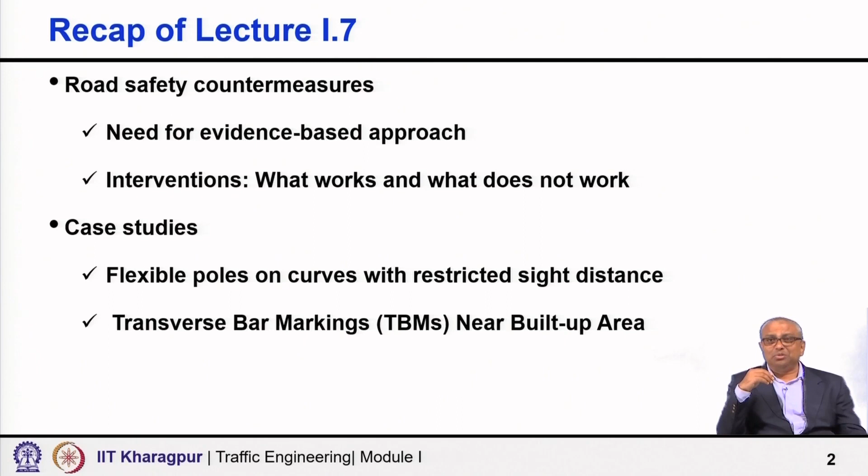With this background, today we shall discuss about the speed management measures. Why are we saying that it is important to focus on speeding? This is the very fundamental question which we should get convinced with the answers, and we should believe from the core of our heart that yes, it is important.

What are the reasons? First, speeding is a major cause of crashes. If you see the data in Indian context, I have shown many data in the beginning in the introductory lecture on this module, Module I Lecture 1. 71% of total crashes, more than that, and more than 67% of the fatalities, the reason is speeding as per the data record. That means speed is a major contributing factor in more than 70% of the crashes and more than two-thirds of the fatalities.

This itself could be the argument good enough to justify why we need to focus on speeding. Over and above, scientific evidences clearly indicate higher the impact speed, higher is the risk of fatality.

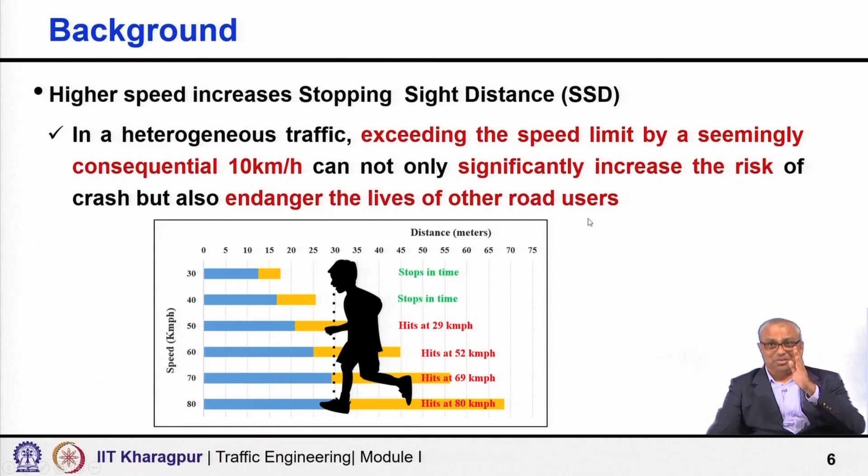So as per scientific evidences, the major cause is speeding, higher the speed, higher the fatality. Speeding narrows down the field of vision. Higher the speed, higher will be the stopping sight distance, the chance of hitting or fatality will also be high, and we have so many physical constraints.

So the only way is, if we want to still reduce the speed, we have to go for speed management and focus on speeding. That is the way out.

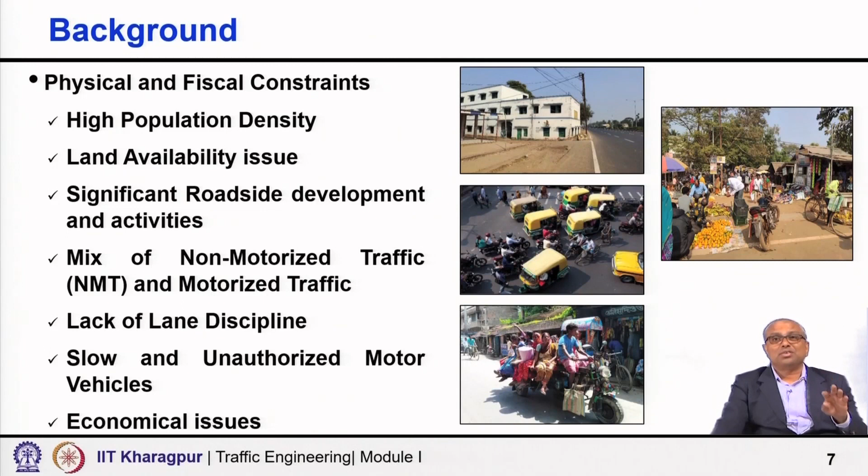So these are all the factors which decide the speed what the driver is using for travel. What is speed management? It is a large set of measures for balancing safety and efficiency of vehicle speed on a network.

And speed management does not include only deciding the speed limit. No, this is one of the components of overall speed management.

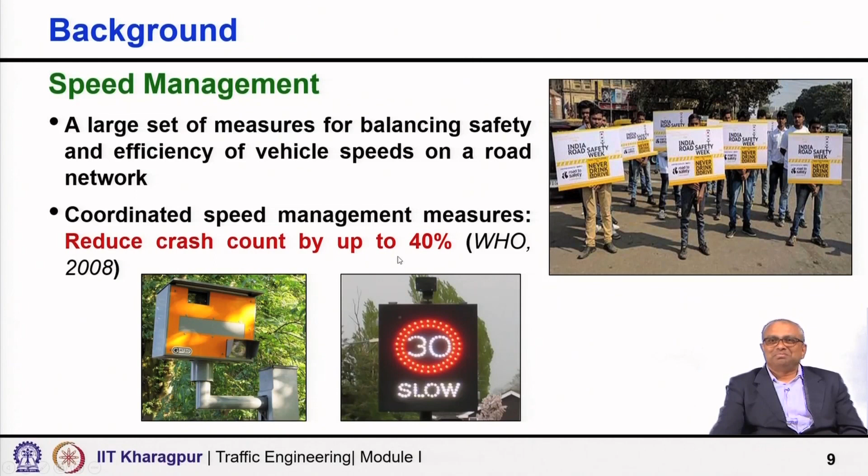Coordinated speed management measures, again this is vital evidence, is found to reduce crash count up to 40%, as high as 40%. See the impact, see the potential, significant impact.

Speed management has got significant impact on reducing severity and socioeconomic loss, and it helps us, speed management, to strike a balance between the safety and mobility. Mobility is also important, safety is also important.

We cannot get mobility at the cost of safety, and especially the fatal accidents, fatal crashes or the severe injury crashes. So a balance is to be maintained. Speed management helps us to maintain that balance.

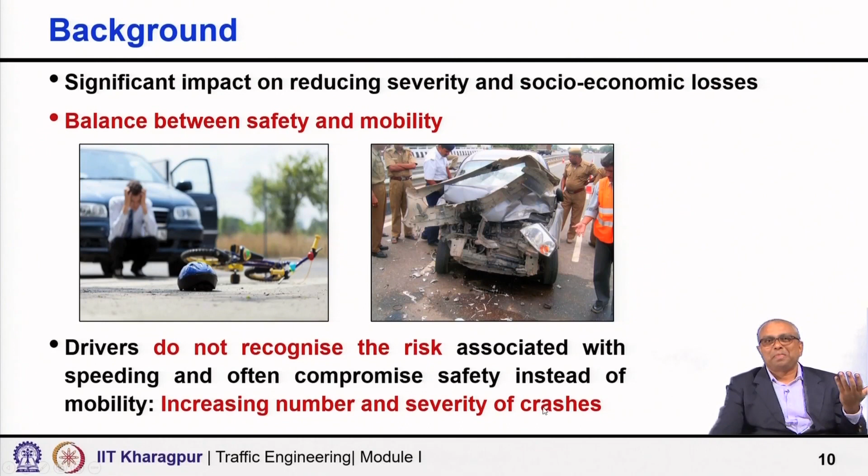Drivers do not recognize the risk associated with speeding and therefore often compromise safety instead of mobility, and the result is increasing number and severity of crashes. What are the measures for speed management?

Speed management measures encourage compliance with both advisory speed. Suppose you have designed a roadway for 80 km/h, right, and accordingly there is a speed limit. Accordingly there is a speed limit, that is the posted speed limit.

And also it could be, in some situation the road is passing through urbanized section or semi-urban development or passing through school zone, and you have a statutory speed limit, which is generally established by the state or the local authorities or the local legislatures. So speed management measures encourage compliance with both advisory speed and statutory speed limits, if any, and in most cases a combination of measures are required to create solutions appropriate to the needs of the location.

Given a location, what are the problems, what are the characteristics, and you need a combination of measures. Which are the key measures?

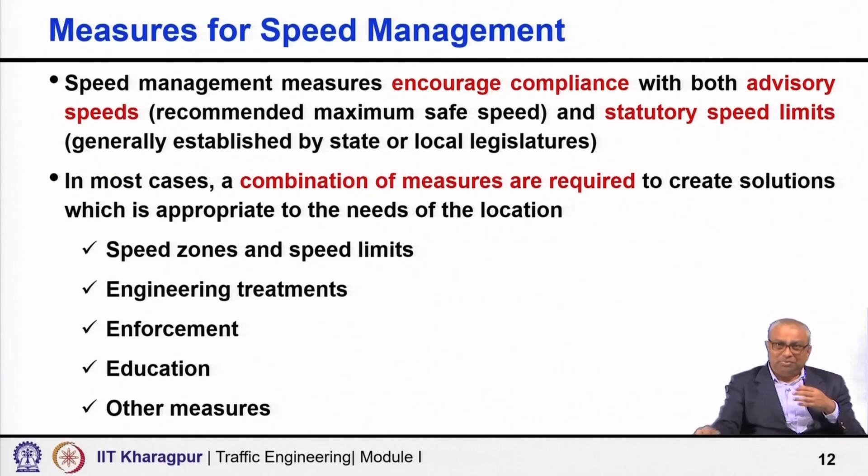Speed zones and speed limits, engineering treatments, physical changes, what you do, engineering treatments, enforcement, very important. Anything you do, if you do not enforce, it will fail. Education, also there are other measures. Let us discuss very briefly about each of these aspects.

First, speed zoning and speed limits. How are speed zoning and speed limits done? One side is based on classification of roads. We all know the functional classification. Different categories of road have different functions in terms of providing accessibility and in terms of providing the mobility.

If you take clearly the national and state highways, maximum, the primary thing is the mobility, not the accessibility. It is the mobility. So obviously my expectation or requirement of speed will be higher.

As compared to that, major district road, other district road, or go to a village road, no more mobility, it is basically the accessibility. So as per the functions, we know what speed zoning is necessary. So we can do speed zonings as per the classification of the road. Similarly, go to urban area, expressways or urban arterials and local streets do not have the same accessibility and mobility functions.

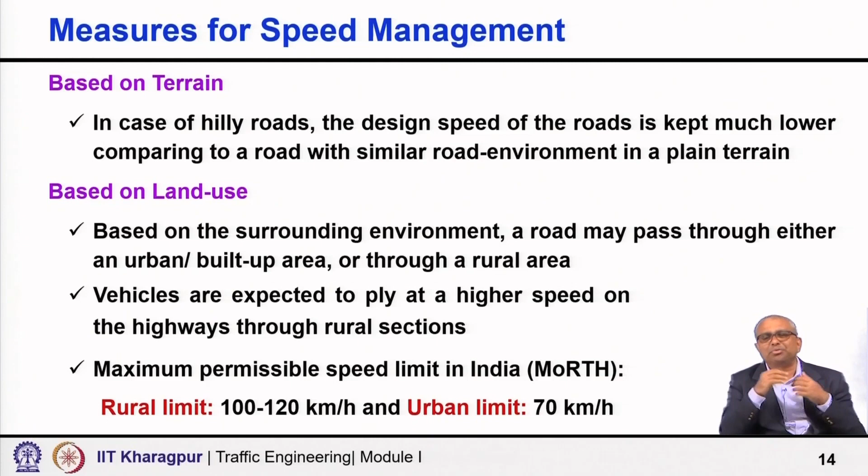Location specific speed zones - this is another way of doing speed zoning. My highway is passing through, say it is a national highway in plain terrain, but that does not mean throughout the length of the national highway, or a stretch of 100, 200, 300 kilometers passing through a state, I will be able to maintain the same speed. We may have to restrict the speed, bring it down as per the location specific requirement.

For example, road with mix of motorized and unprotected vulnerable users, market area, urban, semi-urban development, lot of movement of pedestrians, bicyclists, school zone - reduce to 30 km/h. This is based on human injury tolerance criteria. If a person is hit, the driver may make an error, and because pedestrians and bicyclists are unprotected, a crash might happen. So I am bringing down the speed - the crash chance is high, and I am reducing the chances of fatality and severe injury by setting it to 30 km/h.

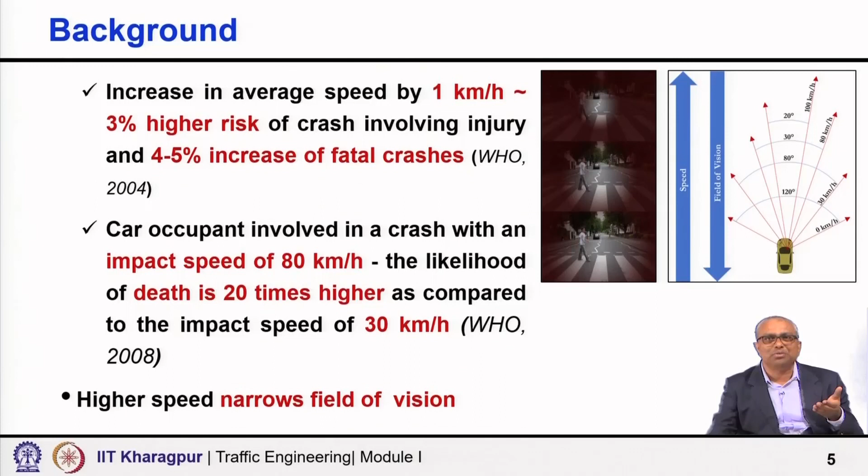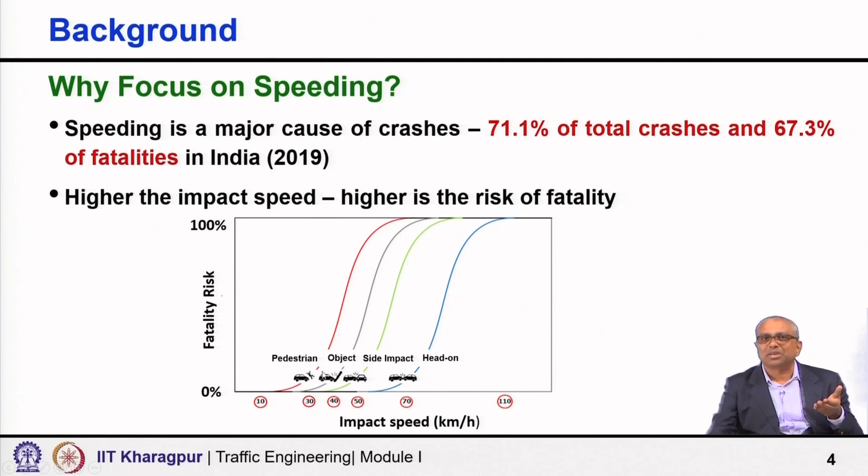You have seen this, I showed you the figure earlier also - here, if you are at 30 km/h, your chance of fatality risk will be only about 10% on a scale of 0 to 100. So make it 30.

Then roads with uncontrolled access, side impact, uncontrolled intersections where we have a crash history and such crashes have occurred - bring it down to 50 km/h, again based on scientific evidence, using injury minimization criteria.

Then for undivided roads, where head-on collisions may happen, 70 km/h should be the speed limit. So that means these are 30, 50, 70.

The focus is not just the road, but more on the road environment, vulnerable road users, crash history, and scientific evidence - pedestrian-vehicle, side impact, head-on collision. What we want is to minimize injury - this is the injury minimization criteria or human injury tolerance criteria: 30, 50, 70.

Generally, we would say 80 and above you can go, but you should only allow that for sections with controlled access facility, completely access controlled with physical median separation - no chance of head-on collision, no question of unprotected pedestrians and vulnerable users, segregation of slow moving vehicles, provision of service roads wherever land use demands it, to take slow moving traffic and non-motorized traffic out of the main carriageway, complete access control, and facilities for crossing.

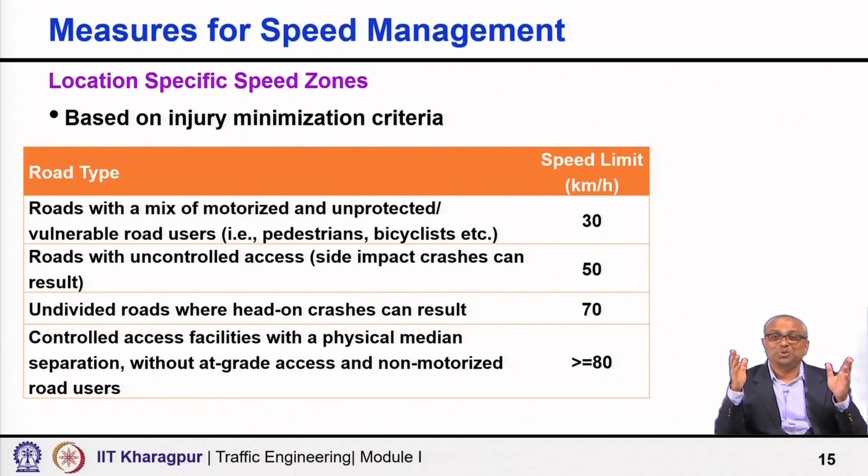You have to also think that for speed limits, road is important, vehicle type is important, lane usage is important, roadside is important, and most important thing in the context of the safe system approach is the human injury tolerance criteria for different types of crashes. We cannot afford to accept fatality and serious injury.

Speed limit in transition zones is required for roads where road function transitions happen, or where the speed of the facility needs to be restricted locally. That means if it is 80, you cannot suddenly make it 40. You need a transition from 80 to 40 - a direct speed change cannot happen. So if you go from 80 to 40, you probably need somewhere in between a 60 limit as well, so that the gradual speed change happens.

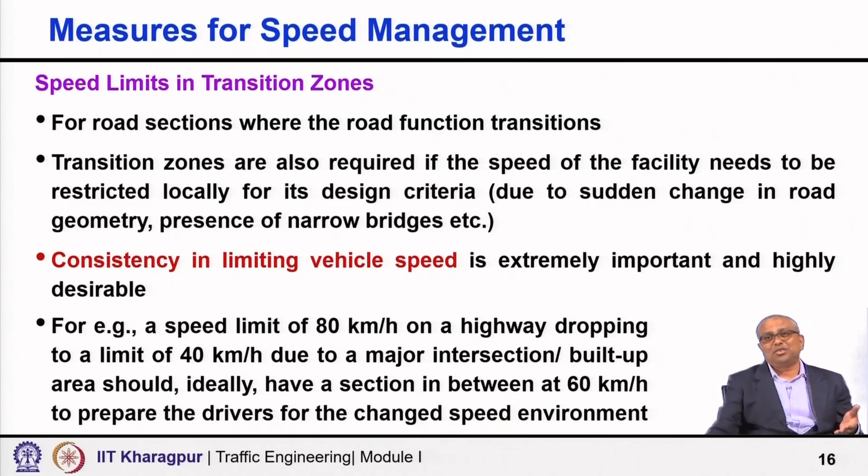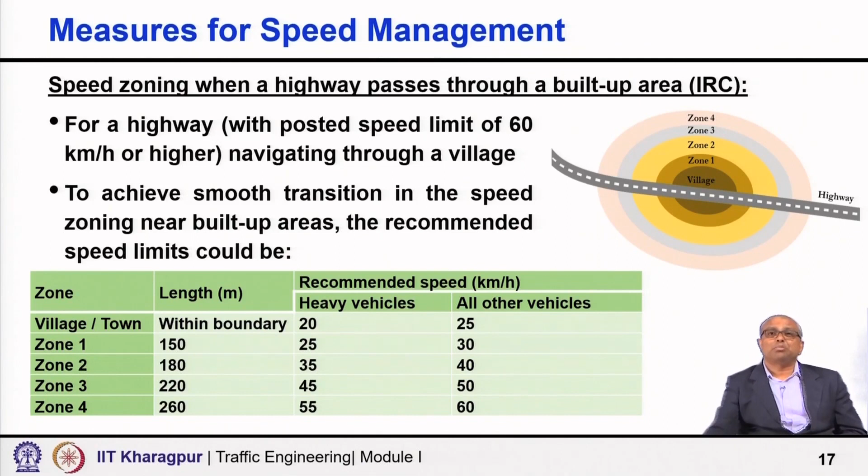Speed zoning, when a highway passes through a built up area - our Indian Roads Congress guidelines give this example. Suppose it is 60 kilometers and the road passes through a village. Within the village, suppose you want heavy vehicles at 20 kilometers, or other vehicles at 25 kilometers - it cannot come from 60 to 25 suddenly. You need zone 1, zone 2, zone 3, zone 4, at different distances. So zone 4 could have 60, but as the road enters the next zone I make it 50, then zone 2 it's 40, then 30, and then gradually you make it 25. So there are provisions, manuals and guidelines which say the transition should happen smoothly, not suddenly from 80 to 40.

Setting of speed limits has 4 basic principles. I'm not discussing each in detail, but the first is the road safety principle - setting speed limits to minimize the risk of fatal and injury crashes to all road users. This is basically the human injury tolerance criteria.

Second is the community well-being principle, suitable for setting speed limits on local roads, because the fundamental consideration there is community well-being. Third is the road network efficiency principle - the function of the road, from highway to district road to village road, or expressway to urban arterials down to local streets. These are important for setting speed limits in accordance with the function of the road and infrastructure standards.

The road user expectations principle means setting speed limits to be consistent with the road environment, characteristics and function of the road. I cannot have an environment which encourages people to travel at a higher speed because the surface condition or geometry is very good, while the road environment actually contradicts that. So it's important that the function, road user expectation, community well-being, and the road safety or human injury tolerance criteria have some kind of harmony, compatibility and consistency.

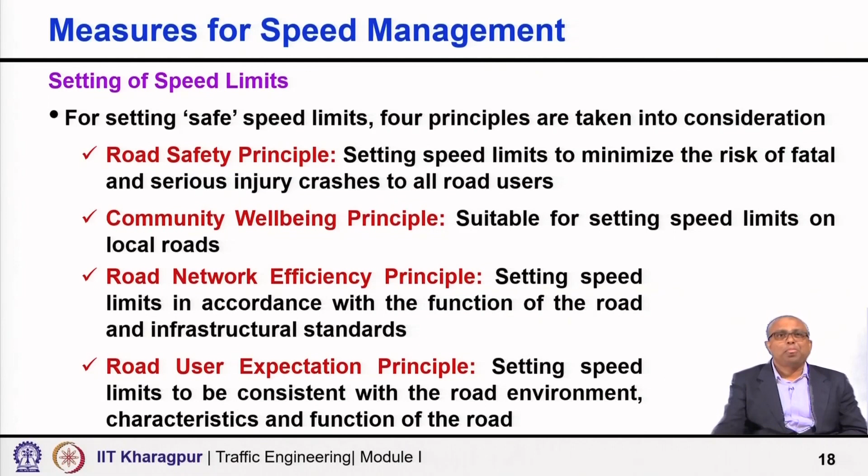These were all about speed zonings and speed limits so far. Now, quickly, engineering treatments - you have to do something; setting the speed limit alone will not work. It includes techniques to control traffic flow and speed, and does not deal with the road design aspect, meaning I am not deciding the design speed or curve design considerations or camber and super elevation.

Mainly these engineering treatments serve two purposes. One is treatments for slowing down, using kinds of traffic calming measures. I want a vehicle to reduce speed - as I was saying, if high speed is not desirable and a low speed is desirable, then my infrastructure should also help achieve that. It's not that the road will just be built and a sign alone will do the work - that will not be possible.

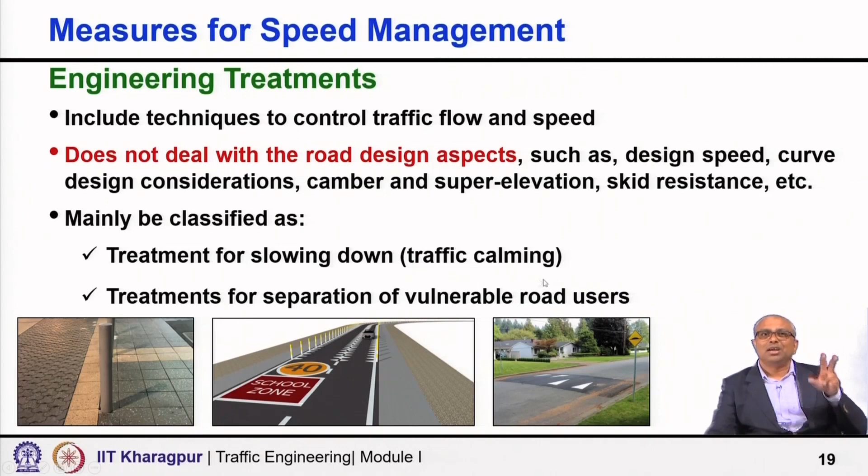Second, engineering treatment is required for separation of vulnerable road users - footpaths, pedestrian underpass, pedestrian overpass or foot over bridge - any kind of infrastructure facility created for separation of vulnerable road users from mainstream high speed motorized traffic. So engineering treatments are aimed at achieving these two things: treatments for slowing down or traffic calming, and treatments for separation of vulnerable road users.

Next, enforcement - very, very important as part of speed management. Whatever your speed limit is, whatever engineering treatment or limitation you do, nothing will give results unless you have enforcement. That has to be there. People should be afraid that if they violate, they will be caught and punished. So enforcement is an effective mechanism to administer penalties for offending vehicles.

It acts as a deterrent. Some tools, as part of speed management, include the use of red light cameras, speed cameras, interceptor vehicles, and proper penalties and fines - but fines that have no real impact serve no purpose.

So small a value is not at all a deterrence, and that is also not desirable, because my objective is not to collect money, but to create a deterrence. So, the penalty must be effective enough to create that deterrence.

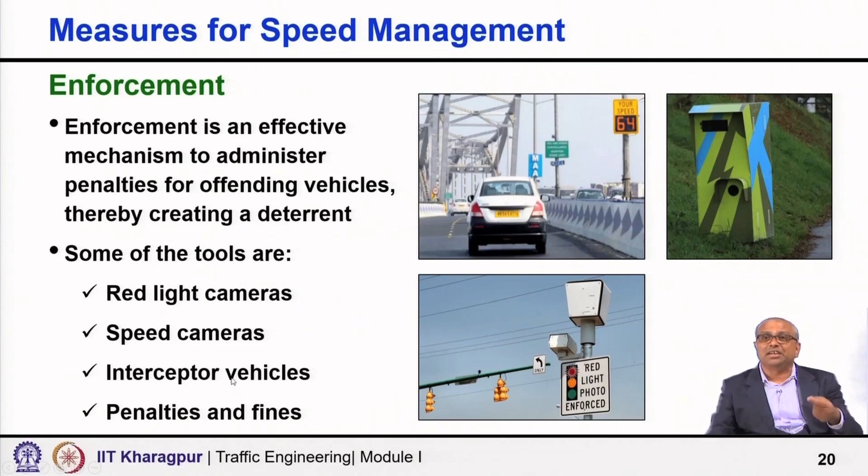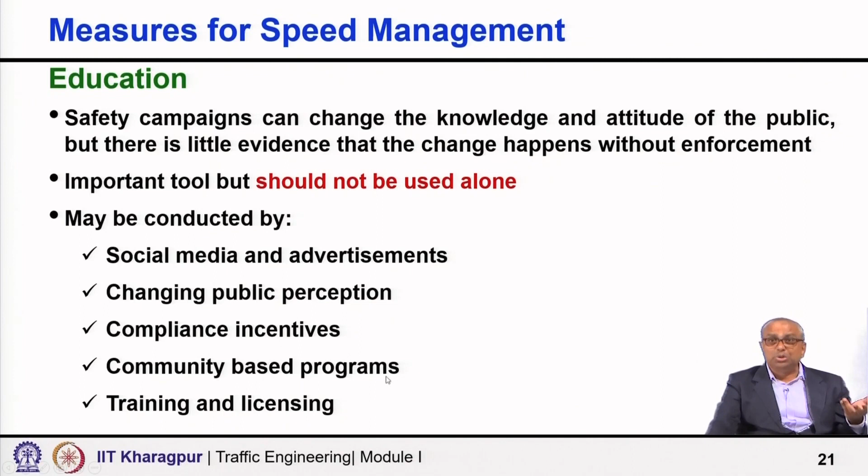Education and awareness are also part of overall speed management. I need to educate drivers. Driver training is again very important. Before licensing, train the driver, give them required knowledge, give them required skill, and since in countries like India overall road user awareness is low, we may use different tools, for example, social media, changing public perception, compliance incentives, community based programs, training and licensing, all may be useful. Then there are other measures which may include psychological measures.

Physical measures are one thing, but here we are trying to use psychological measures to increase the cognitive burden and change the behavior. Psychological measures generally produce smaller speed reduction, but sometimes they are more acceptable to drivers, and that small reduction may also be quite useful. Examples may be the presence of trees or overgrowth on the roadside, or rough road surface.

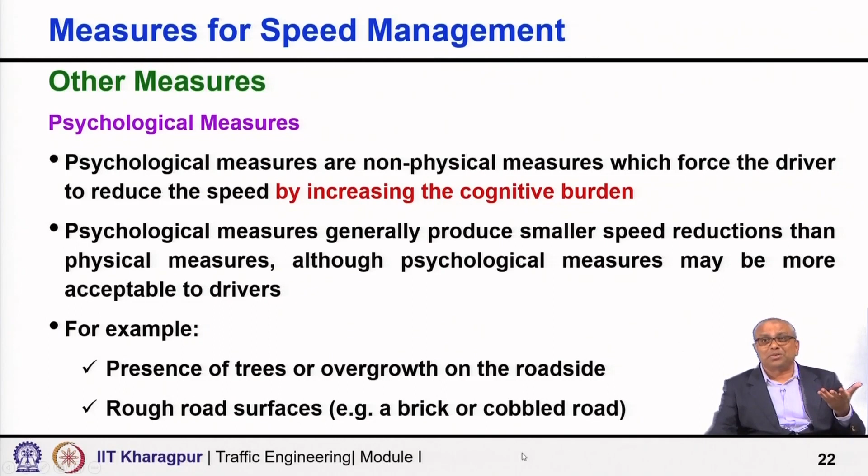The road surface is not so proper. There could be other counter arguments, but the point is that psychological measures influence behavior not through physical measures, but through psychological measures. There could be better examples also, and I am sure there will be better examples.

Intelligent speed adaptation is a system which ensures that the vehicle speed does not exceed a safe or legally enforced speed. There are two kinds of systems possible: active systems and passive systems. Passive systems are generally driver advisory systems with visual and audio displays, telling the driver you are traveling at a higher speed, you are exceeding the safe speed limit. They are not controlling, only repeatedly sending messages and alarms.

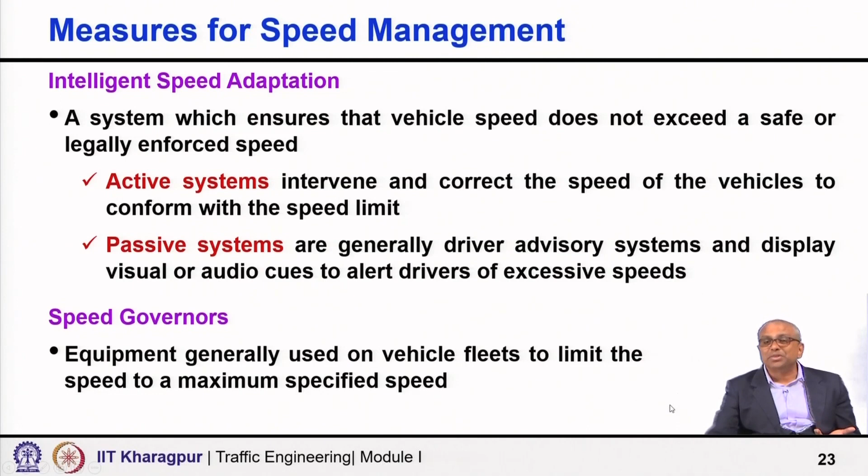Active systems actually intervene and correct the speed of vehicles to conform with the speed limit, such as speed governors, equipment generally used on vehicle fleets to limit speed to a maximum specified value. For example, commercial vehicles may be speed limited to 80 km per hour, they cannot travel more than that. Buses, public buses, and school vehicles find it very effective to use speed governors.

Last but not the least, other measures may also include speed management by employers. Public service drivers and truck drivers are usually under pressure to meet daily targets, resulting in speeding and excessive driving, because they have to do the delivery on time. The food delivery system is again a concern.

Sometimes the evidence is not so encouraging. Also with travel agencies, you do not know how long their drivers have been driving. You wanted a vehicle and a driver came with it, but you never know how long that driver has been working continuously. Commercial vehicle drivers are given a target that they have to reach the destination by a certain time, for reasons like carrying groceries, vegetables, and perishable products. If they cannot reach the destination on time, the vegetables and perishable goods cannot go to market that day.

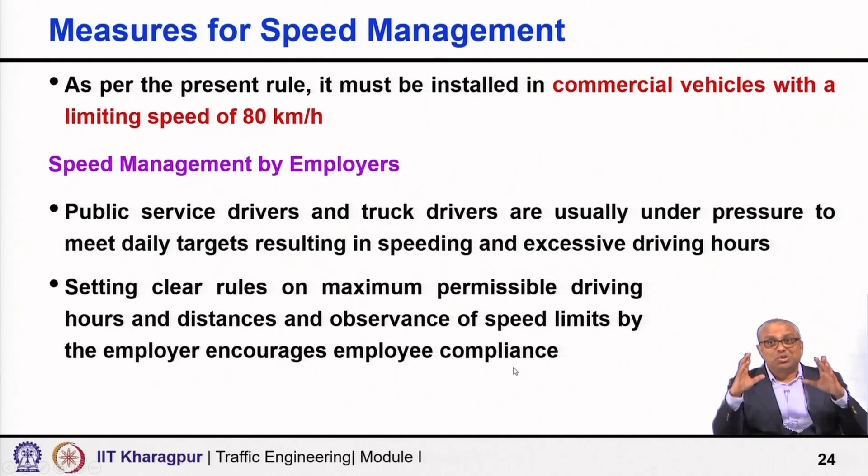So setting clear rules on maximum permissible driving hours is very important. This system is very good in the developed world, but unfortunately in nearly all LMICs it is very weak. You have no control on how long a driver is driving continuously, and sometimes a driver is driving the whole night and then doing duty the next day as well. So setting clear rules on maximum permissible driving hours and distance, and observance of speed limits by the employer, encourages employee compliance. The rules and regulations framework is very important.

So altogether, this is what we discussed about speed management: why we first focus on speeding out of all the important points, then briefly the factors influencing speed, what speed management really is and what it includes, then the measures for speed management, speed zoning and speed limits, the different bases for speed zoning and setting speed limits, engineering treatment, enforcement, education, and other measures.